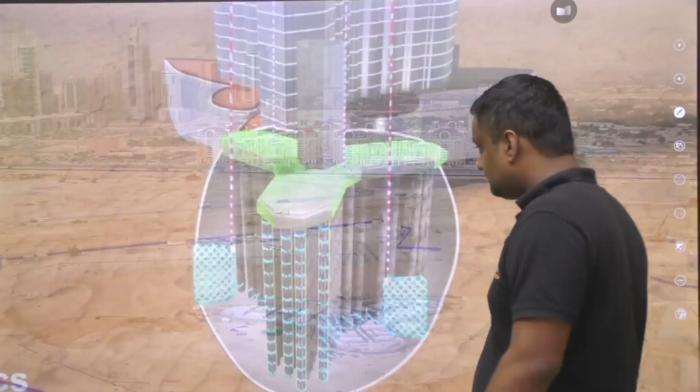Of course, for the Burj Khalifa they have invested a lot of money, but now all that money is coming back through tourism and other things. Now coming to the foundation, let me tell you guys, 24/7 electricity is passing through these 192 piles. Why? I'll tell you later.

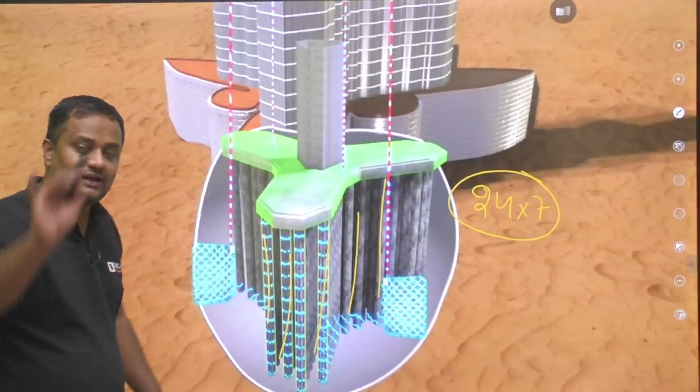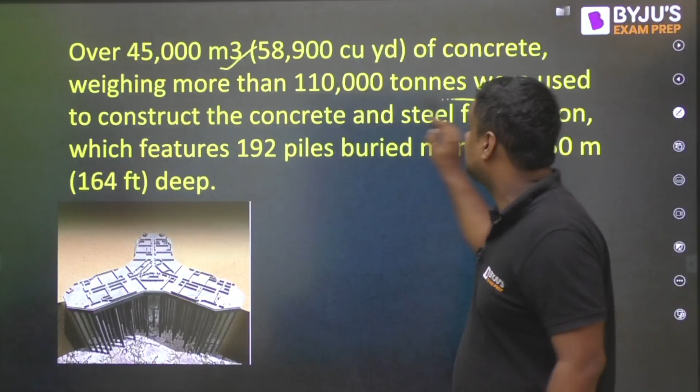Friends, what is the foundation? The foundation is, of course, a deep foundation, the pile foundation. Why it is a deep pile foundation, I'll tell you. But over 45,000 cubic meters of concrete weighing more than 1,10,000 tonnes is used to construct those 192 piles. Now, why is the pile foundation done?

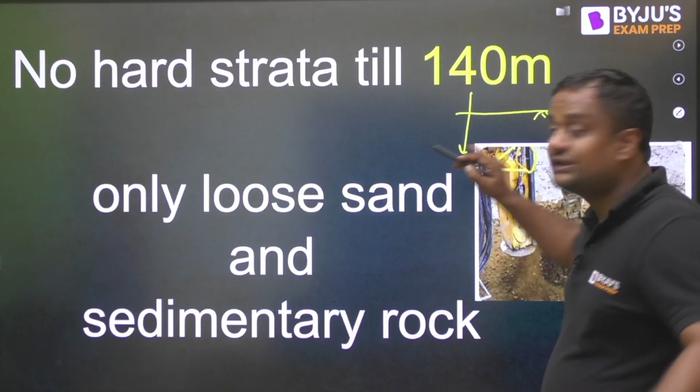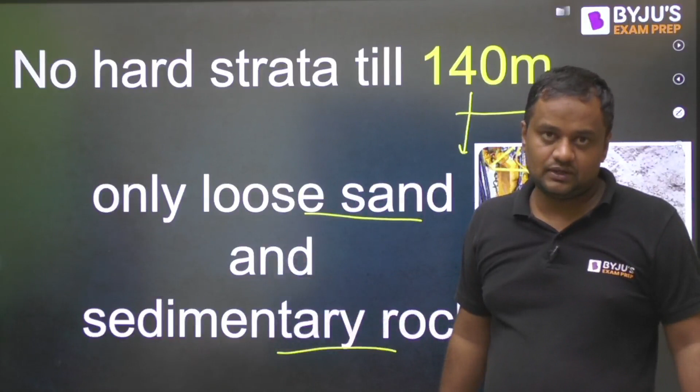Because when the soil exploration, the soil testing was done there, and they were excavating the soil, up to 140 meters no hard stratum was found. Only loose sand and sedimentary rock, over which such a huge building cannot be supported. Ultimately all the loads will be transferred to the soil. If there is a hard stratum, we can rest the piles there, but the hard stratum was not present. Only loose sand and sedimentary rock. Sedimentary rock itself is not hard.

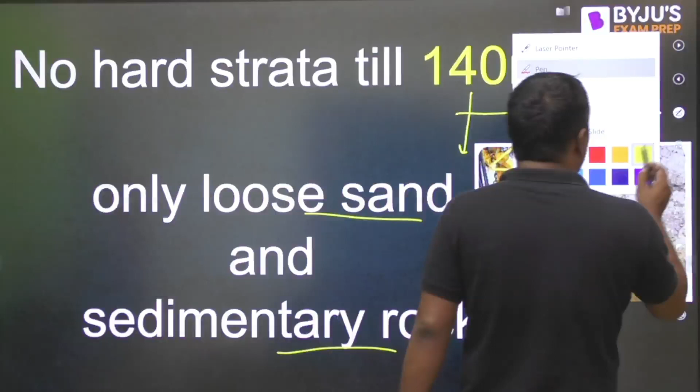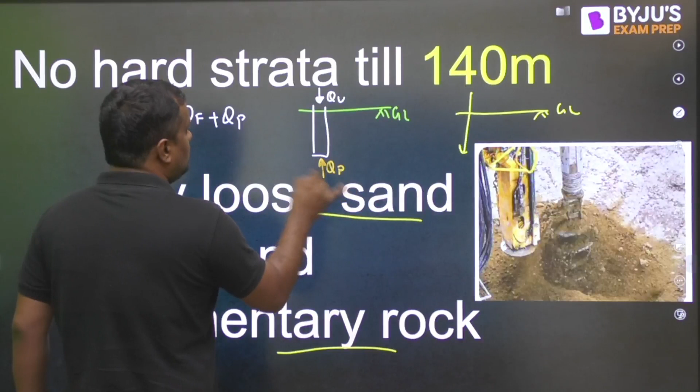So what the civil engineers proposed here, the students who have studied pile foundation may be knowing: whenever the ultimate load QU comes from the top, it is resisted by two things, QF plus QP. Of course, here QP will not be much. QP is almost zero, almost nil, because the hard stratum is not there. So nobody is resisting from the bottom. So the maximum load we are getting from friction.

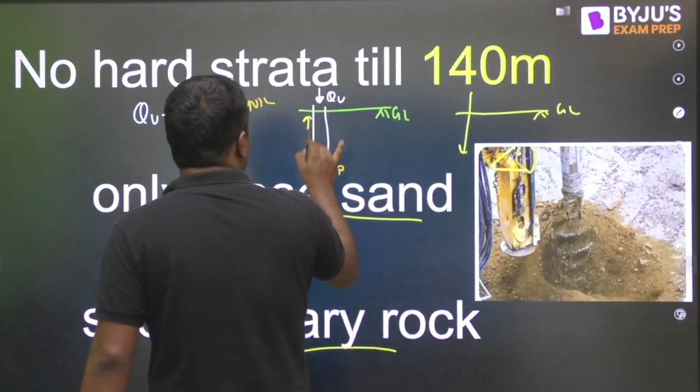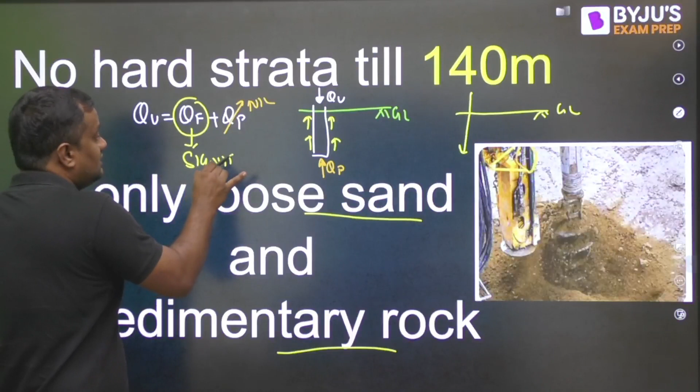So such long piles with large diameter have been made, so this QF is significant. So they are resisting the load mainly from friction, because there is no hard stratum to provide the QP. Now the raft, you have seen that this is a buttress shape so that the wind load can be resisted. Now, what is so special about this buttress shape? I will be coming there also.

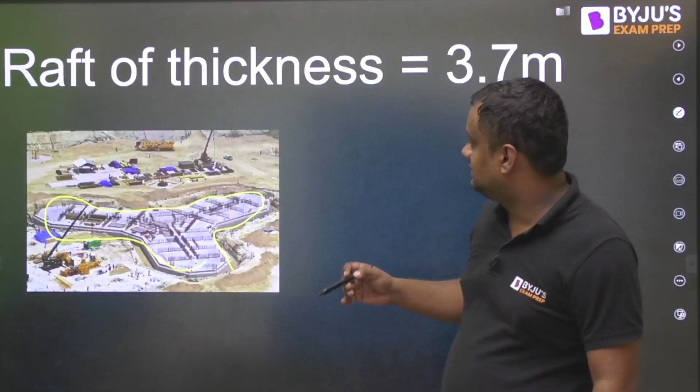But let me tell you, the thickness of this buttress-shaped raft is 3.7 meters. 3.7 meters is the height of two adults: if you put two adults one over the other, the height will be approximately 3.7 meters. So that much thickness of concrete has been made.

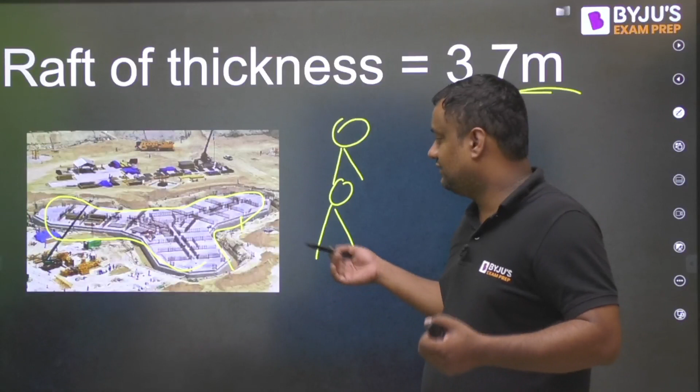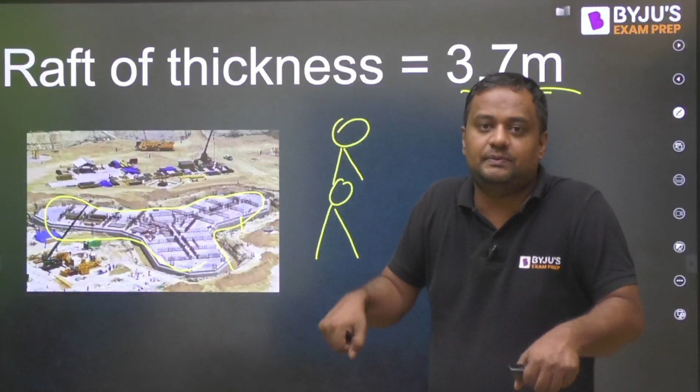And guys, usually when we make concrete, we use a vibrator for compacting the concrete. But here, due to the huge deep pile foundation, this cannot be done. So a special type of concrete, which is very liquid compared to ordinary concrete, has been used so that it can be compacted naturally.

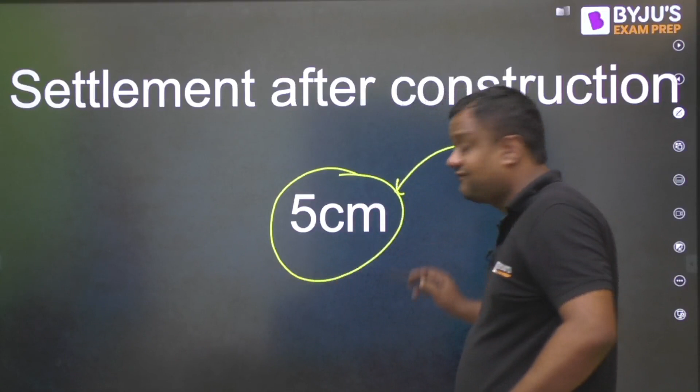Now the settlement found was 5 centimeters, which was within the permissible limit. After the construction was completed, the settlement was 5 centimeters. See, a 163-story, 828-meter high building with tons of load, and the settlement is only 5 centimeters. That is only due to the significant value of QF. The foundation took 2 years. Now a very important thing, guys.

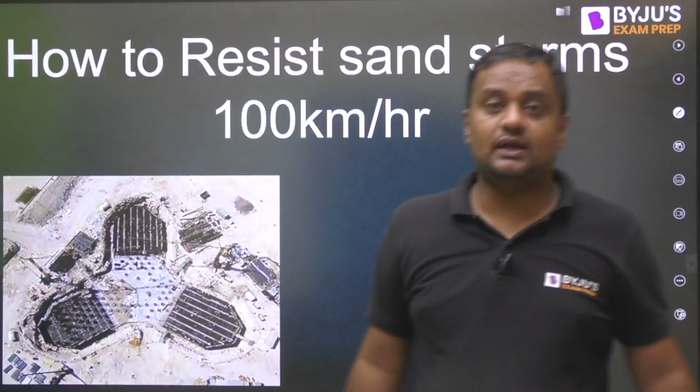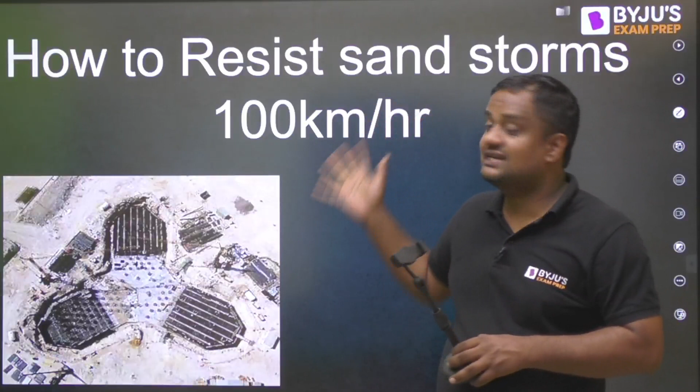Apart from the huge dead load, one major challenge in Dubai was the wind; for this huge building, the wind load will be there. And of course, in Dubai, sandstorms also come at approximately as high as 100 km per hour. Due to these wind loads and sandstorms, this Burj Khalifa may collapse.

Now let me tell you what usually happens. Suppose this is a tower and I'm putting the glue exactly at the center. Then with a certain load, this can topple. But if I'm not putting the glue exactly at the center, I'm putting the glue at the circumference, at the periphery, then it has been observed that the chances of toppling are decreased. So instead of putting the glue here, we should put the glue here so that the chances of toppling are decreased. The architect Bill Baker has done the same thing here.

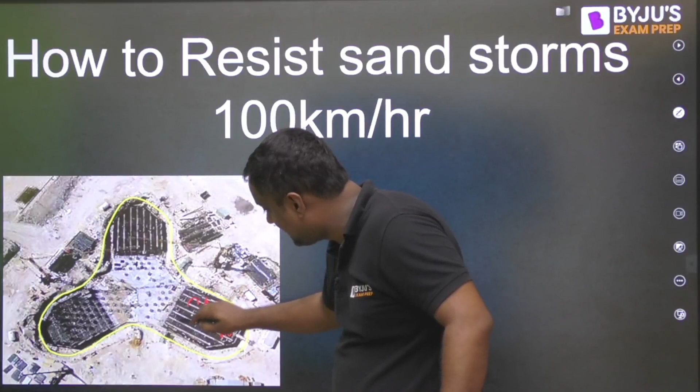On the periphery of this buttress structure, guys, more piles have been used. The density of piles is more near the circumference, and compared to the periphery, here at the center the density is less. So like the example I gave you, more glue at the corners, at the periphery, at the circumference, means less chance of toppling due to wind load and sandstorm. So the buttress structure is made such that here there is more density and at the center the density of piles is less. So more support is near the periphery or the circumference.

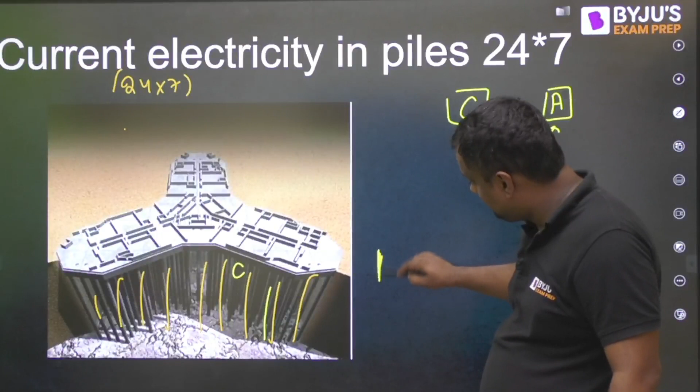Now you might be wondering why these piles are carrying current 24/7. This is a concept of current in which I am not going very deep. It happens in a battery also: there is a cathode and an anode, and most of the deterioration of material happens in the anode. So these piles have been made the cathode, we are putting an anode there also, and we are flowing the current. So all the electrons go to the cathode and impurities stick to the anode. So the piles are not getting corroded, but the anode is deteriorating. That is why at certain intervals the anode is replaced with a new one.

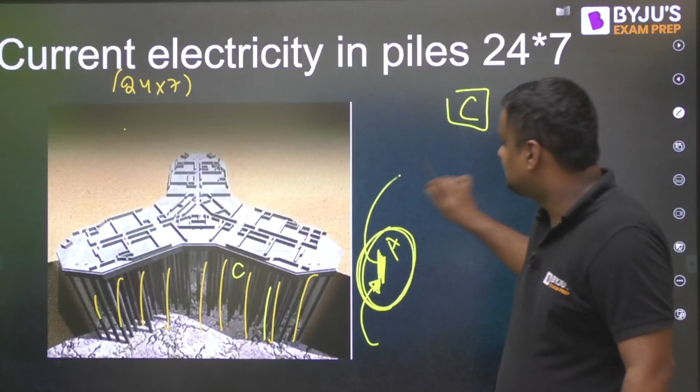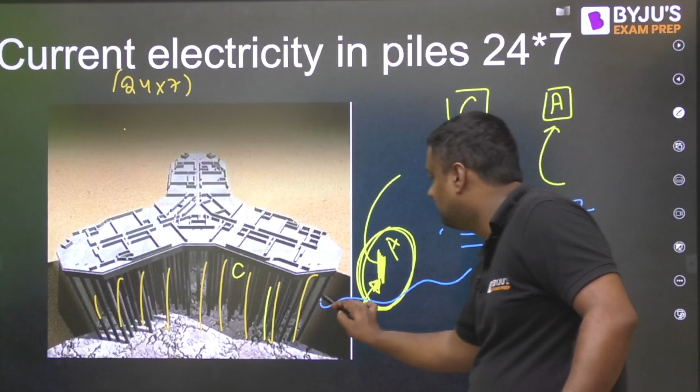Why is this done? Because nearby Dubai there is the Persian Gulf, and water can come from there, which may deteriorate the piles; their strength can be reduced due to corrosion, and this can topple. That is why a current is flowing, so that the pile acts like a cathode and all the impurities go to the anode. The anode will deteriorate, and after some time we will replace the anode.

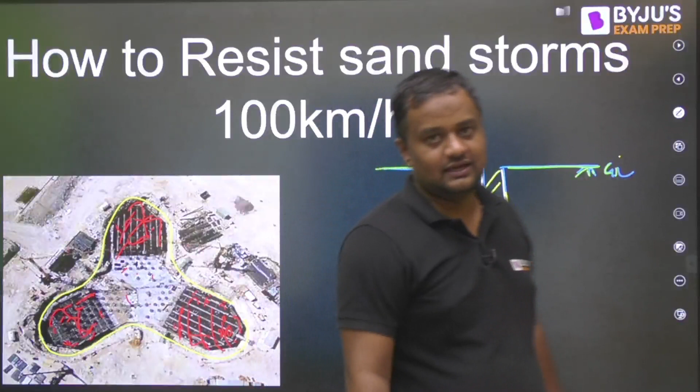One more major challenge was excavation. Suppose this is ground level. When we are excavating, these excavations may collapse. So while excavating, we are putting slurry in simultaneously. This slurry has high density, so the walls of the excavation do not collapse. Then the precast piles are inserted in these holes. An auger has been used for drilling. So this is all about the foundation, guys. Frictional piles are used.

The slurry has been put because, see guys, the critical height of excavation is 4c by gamma root k, which you studied in the earth pressure chapter. This depth is much more than that critical height. That is why slurry has been put, so that the walls do not collapse. Slurry is holding the walls intact. So these were all the challenges, and that is why civil engineers are there, for facing and overcoming these challenges.